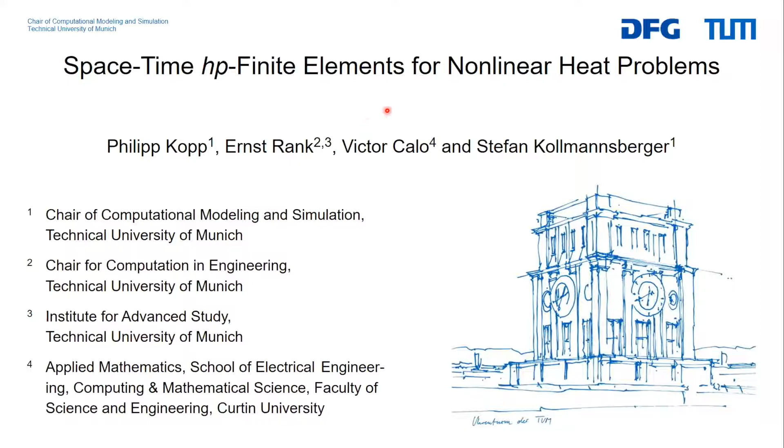So before jumping into it, I would like to give you just a short introduction, or an idea of the presentation. So we have been talking about simulating the heat evolution in SLM processes over the last days. And I think the common agreement is that we need some sort of local refinement. And HP finite elements have been really successful in dealing with the multi-scale nature that we have in space. But one of the issues that we still have is that in time, it's the same thing, right? So it's not only multi-scale nature in space, but also in time.

And the idea of this work is that we consider this combined space-time domain, and then we don't do a time stepping, but we discretize this with space-time finite elements, and that would allow us to basically choose an adaptive method that doesn't only refine in space, but in this combined space-time domain. Now, to recover the video that I just showed, you would then have just a slice that sort of travels through this domain in time.

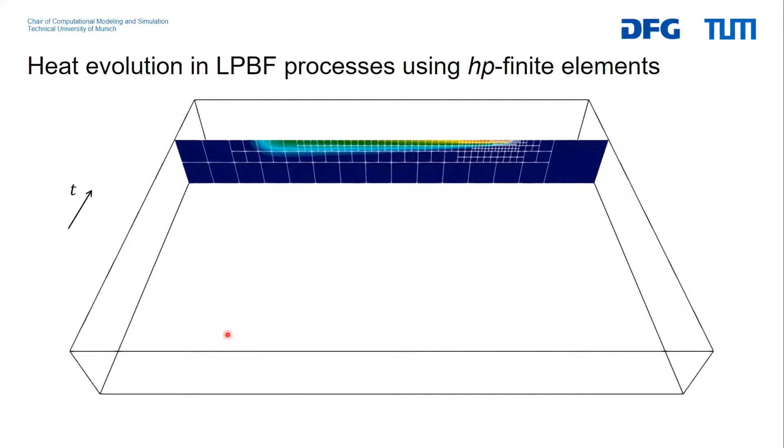Of course, solving the entire problem in one go isn't really attractive, because that would limit the kind of problems that we could compute. So we would still like to recover a stepwise solution, or as we call it, a slab-wise solution, where we basically choose parts of the entire time domain, and we progress in steps that are conforming to the elements of the base mesh here.

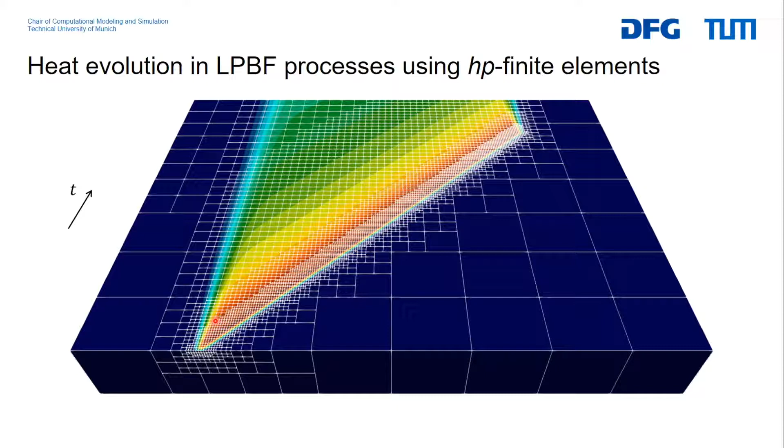And then the idea is that as opposed to time stepping, we can really choose also the problem size. So if we are simulating on a laptop, for example, we could choose very small time slabs that are still refined locally in space-time. But if we think of really utilizing HPC resources, then we could also go for very large time steps. That would then be very expensive to solve, but also give us the solution of maybe even many laser strokes.

So my talk is structured as follows. I will introduce the model that we are using, then I will talk about the formulation, and I will try to give you an idea of how we define these HP basis functions in 4D, which is eventually the goal. And this, of course, requires some structure.

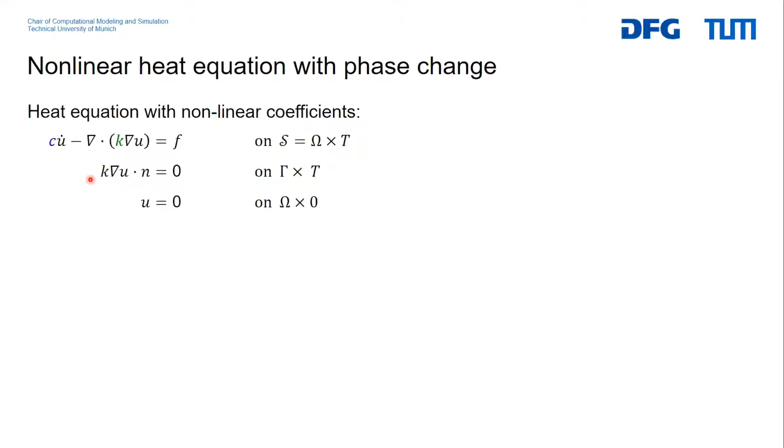So we use the nonlinear heat equation with phase change. So we have also a volumetric source here that basically has an extension in the z direction. This is a parameter that we can choose and then fit to the measurements. The phase change model adds this latent heat term here, which is then expressed in terms of this smooth phase change function. And this gives us this peak in the heat capacity.

And on top of that, we also add a little bit of conductivity in the liquid phase, which allows us to dissipate the heat a little bit faster, which is mainly there to tune the length of the melt pool. It doesn't really have too much influence on the other parts. The depth of the melt pool is influenced by how we choose the z extent of the source. And then the entire cross-section area is determined by the absorptivity that we choose.

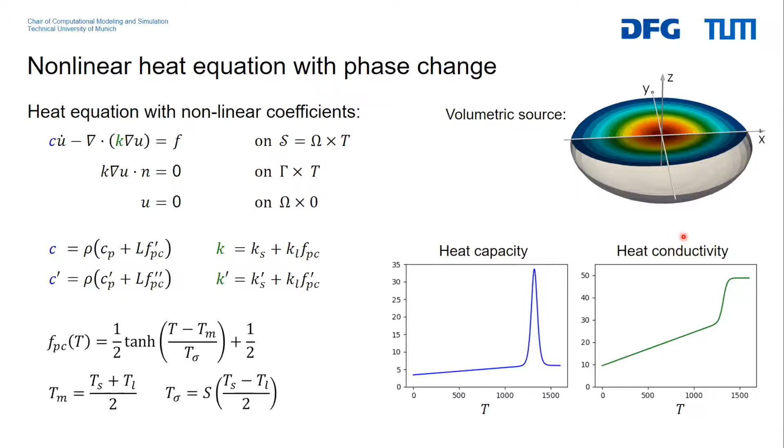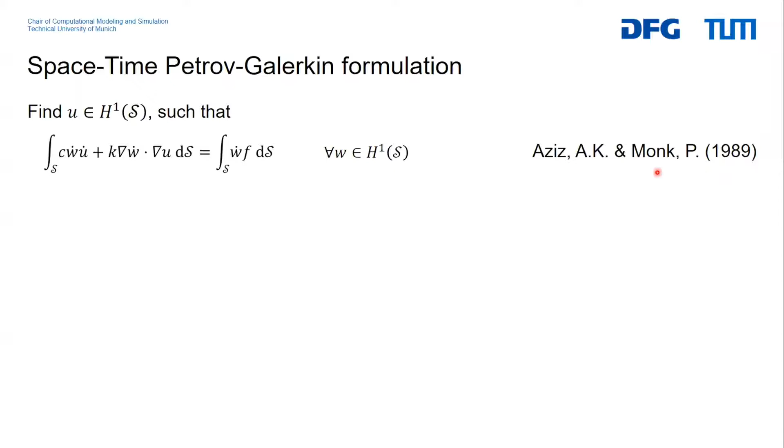The weak form is then a Petrov-Galerkin formulation, where we want to find a solution from H1. But instead of testing with the standard functions from H1 as well, we test with the time derivative of those. And you can really see the connection here to convection dominated flow, where you have these streamline upwind methods, which in our case is a bit easier because it's a pure transport in time, and it's really orthogonal to the space direction. Then you have only diffusion in space, but no diffusion in the time direction. So this simplifies things a bit. This is a not so new approach that you can check out here.

The discrete weak residual and the linearization is then the following. And you can also see that we have the time derivative on the test functions here. This gives us this mixed term between the time derivative and the spatial gradient. But through the way that we choose our meshes, and the way that they're orthogonal between space and time, it doesn't really pose any challenge.

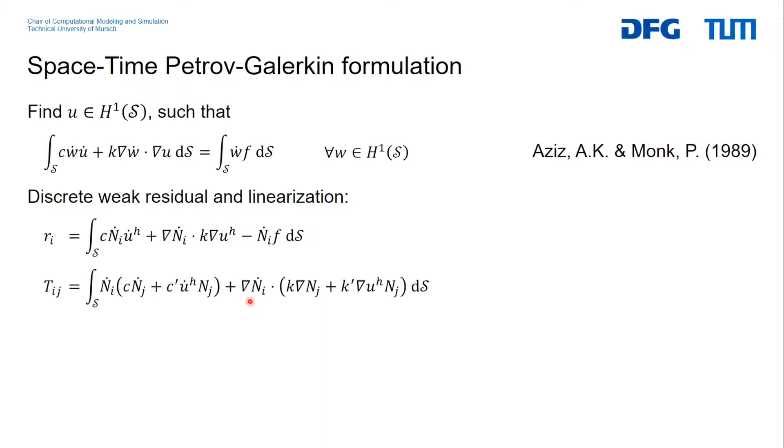Then to make the nonlinear iterations converge nicely, we have to make sure that we integrate the elements that contribute to the phase change accurately enough. And because the nonlinearities introduced are pretty tough, we also use a bisection type algorithm that helps us to obtain an improved update as opposed to always following the entire Newton update.

This is especially important as with this space-time approach, you don't really have a nice initial guess. With time stepping, you can always use the previous solution as a kind of initial guess. But here the previous slab really just serves as the initial condition, which is a Dirichlet boundary condition for the next slab. And that doesn't really give us any information about how this then extends into the domain.

So something that we also do to make this a bit nicer is that we start with a very smooth phase change that helps us to obtain a good initial guess before we then set this parameter to whatever we want.

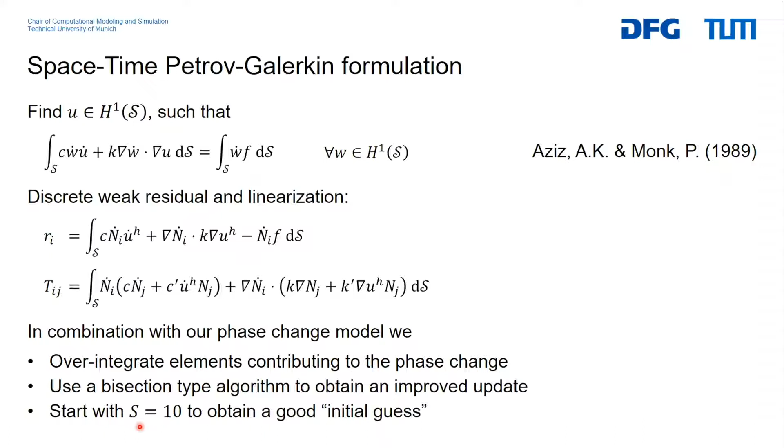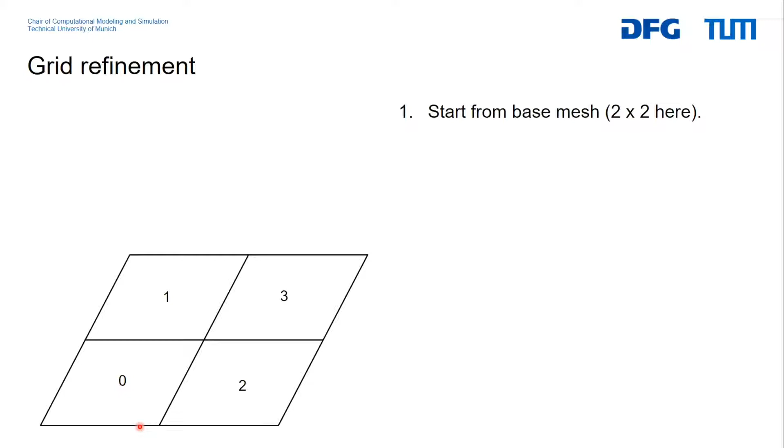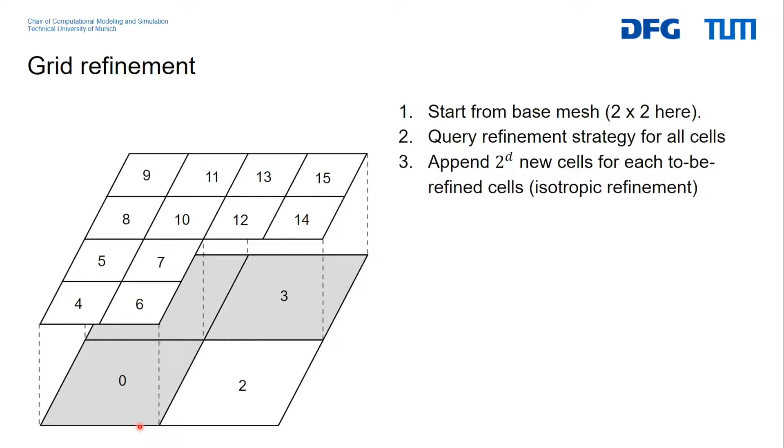So then the real challenge is to define these HP basis functions in 4 dimensions, or in general in more than 3 dimensions really. And we do that by first starting from a base mesh, and then we have a space tree based refinement. So in 2D here it would be a quad tree. We query a refinement strategy that gives us some cells that we want to refine, and then we do this recursively until we don't have any elements to refine anymore.

Then we select some polynomial degrees. So in this example here, I choose polynomial degree 3, 2, and 1, which is really just for the example. There's no restrictions with respect to the polynomial degrees. They can differ between elements. They can be anisotropic and so on. In the hierarchical view, we would have something like this.

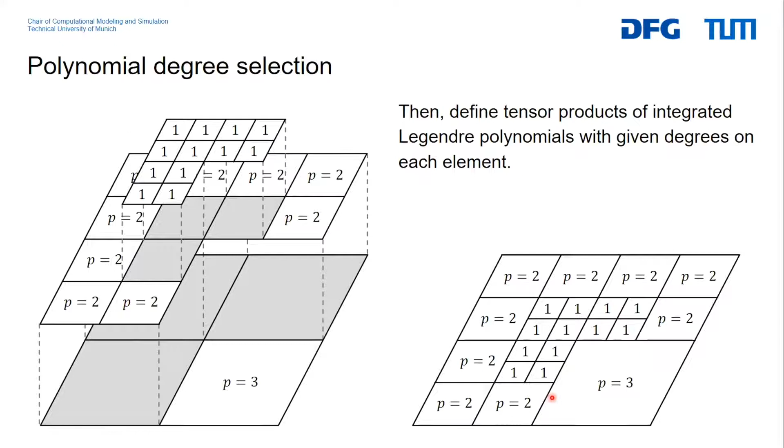And this leaves us now with the problem of hanging nodes. So you can see here that there are some nodes, or some edges, that are not really compatible. And this then translated looks like this. So we have shape functions here that we would like to complete with something like that. But instead we have these shape functions, and then the question is how do we find a combination that adds up to that, and especially how do we do that in 4D?

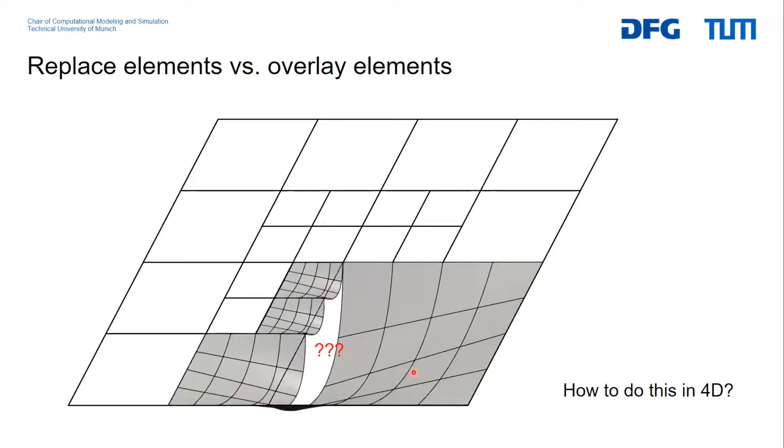So the idea of this multi-level HP approach is to go a different route and realize that we have a hierarchy in our grid, and that we can really just complete this shape function on that side without really bothering with these overlay elements. And of course, as you can see, there's a difference in the support. So you have a slightly larger support here, but this is just a trade-off, and this price is something that we have to pay with that method.

Now, one thing that we have to make sure is that on these overlays here, we don't have any active shape functions, because otherwise there's nothing on this side to complete those. So that's the only constraint that we have to satisfy. And in order to do that, we distinguish between external boundaries, so these are cell faces that coincide with the domain boundary.

And on the other side, internal boundaries, which are cell faces that are not part of the external boundary, and they are also not interfacing to another cell of the same level. So it's different levels. And then we have cell interfaces, which are just interfaces between 2 cells of the same level.

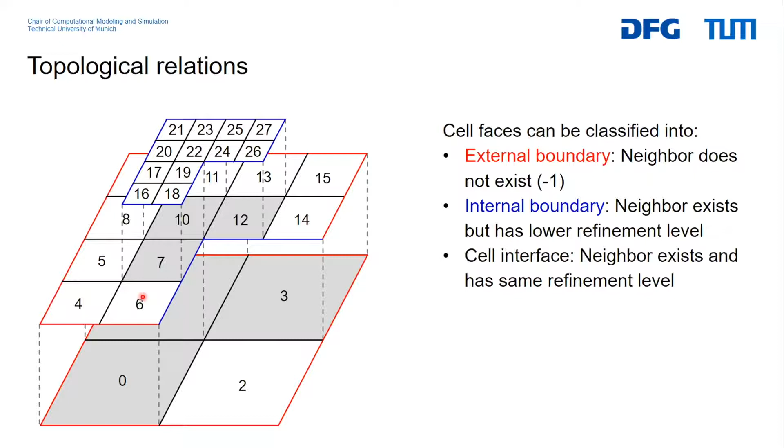So this then allows us to construct a multi-level HP basis with the goals that, first of all, we want completeness. So each leaf should be able to represent polynomials according to whatever we chose. We want to have continuity, so no overlay basis functions. Translated to our setting, that means that no overlay basis functions shall be active on these internal boundaries, so the blue lines from the previous slide.

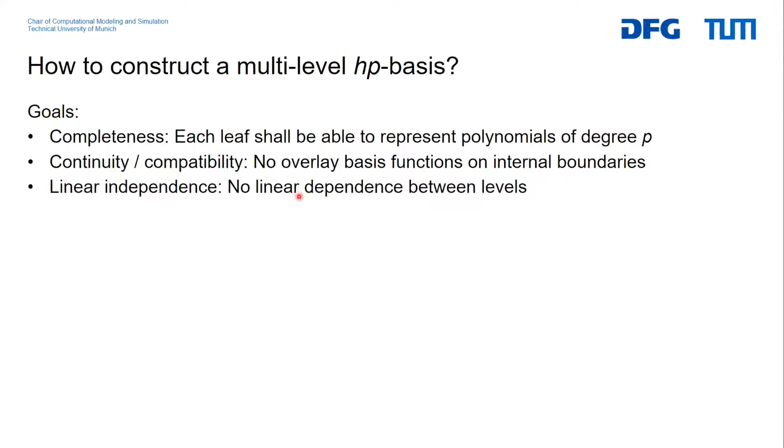And we also need to be a bit careful with what shape functions we introduce in order to not introduce any linear dependence between those levels. And the basis for the algorithm that I will just quickly show in the next slides is that we use d-dimensional arrays of Boolean values that we call tensor product masks to track active shape functions.

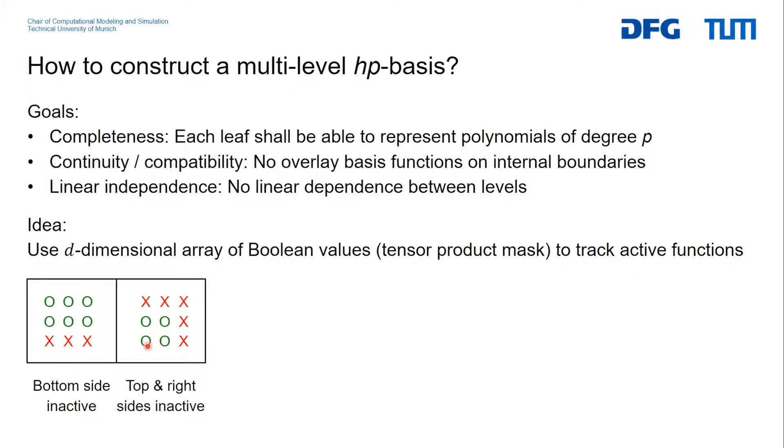So that then looks like this. So we have in this example 2 cells, and we have this tensor product mask, which in 2D is really just a matrix basically that tells us in the tensor product of our shape functions which are active and which are not active. And clearly in this case, we can see that we are not having a compatible set of shape functions. So there's no way that we can combine them to something that is continuous.

And in order to do that, we have 2 operations that restore that. So we have an operation that takes these 2 slices and activates shape functions if they are active on one of the 2 sides. So this is what you could also say is a Boolean or logical OR operation on these 2 slices. And on the other side, we have something that deactivates if a shape function on one side is not active. So this would then be a logical AND operation.

And this is really the core idea of what I'm presenting, that we have algorithms that work in terms of the interfaces between cells and nothing else. So we don't really consider anything else. We just try to formulate our algorithms in terms of these, because that allows us to extend those algorithms to really any dimension, because it's not really hard to do in 4D or in really any dimension.

So I would quickly like to show the algorithm just to show you that it's really no magic and it's a pretty simple idea. So the algorithm is that in the first step, we activate all the shape functions on our leaves of the refinement tree. So that will give us something like this. So we have polynomial degree 3, 2, and 1. And on the others, nothing is active. And this leaves us with a state of non-compatible shape functions here.

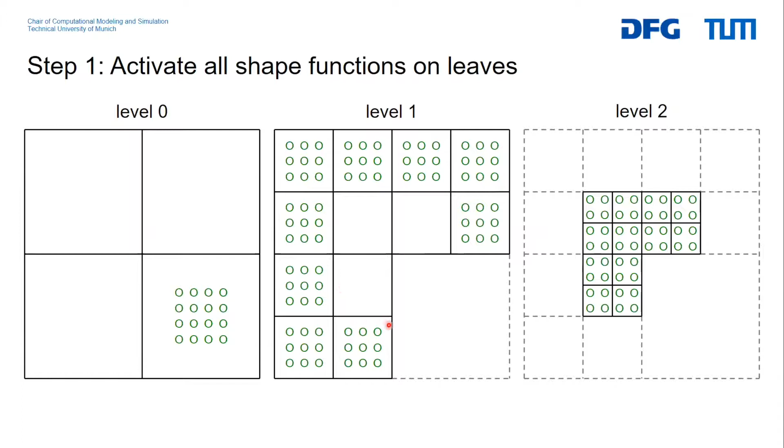So in step 2, we use this OR operation to activate shape functions on these non-leaf cells. And as you can see here, there's one contribution missing from this cell that should contribute to this nodal mode. So we have these 3 contributions, but it's not completed by this cell. So we have to basically follow this with another iteration of this algorithm to then communicate the information from here, not only to these 2 elements, but also one distance further.

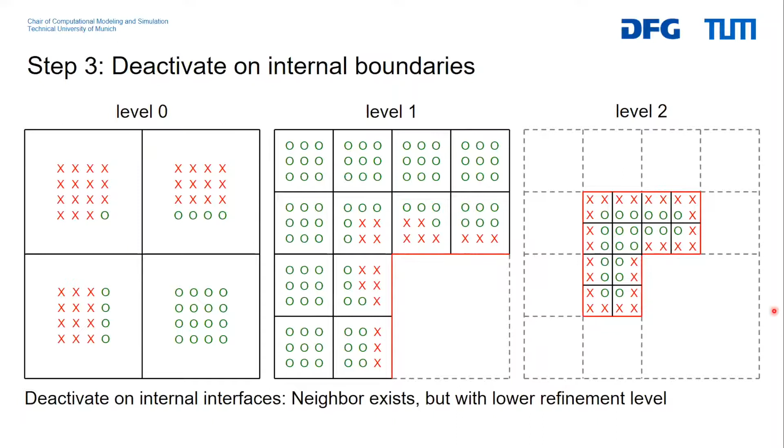Then step 3 is that we deactivate everything on internal boundaries. As you remember, we have these internal boundaries here, and we simply deactivate everything. And we have a similar scenario that there's one shape function here that still contributes to this nodal mode, which should have been deactivated. And therefore, we follow by another step that's very similar to the second iteration, now just with a Boolean AND, and this will deactivate that shape function. And that's basically it. I guess this is the core of the algorithm. And what you see here is the state of what shape functions are active and what shape functions are not active. And the principle is the same for 2D as it is for 4D.

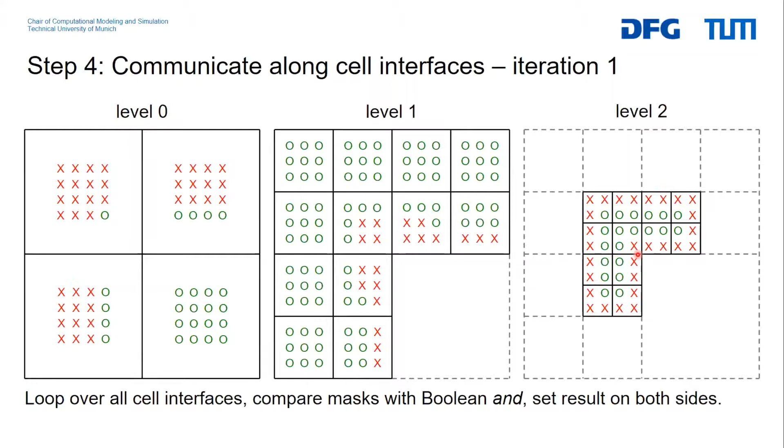Now there's another step that I don't really go into much detail, but it follows a similar idea that then constructs the global indices and leaves us with just a numbering where we can see, for example, here that this nodal mode has contributions from all these 4 cells as we would expect.

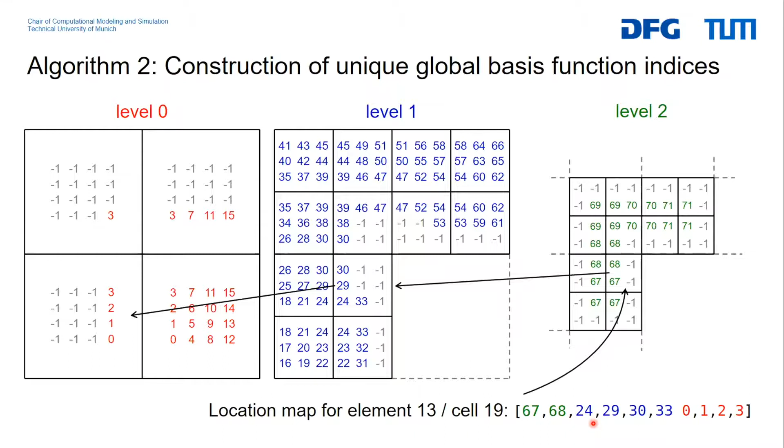And then the location maps for the individual elements would be the active shape functions plus all the parents. So we then take these 2 active shape functions and we append all the parents. And that will give us the location map for this element. And as you can see, there are slightly more than the 4 shape functions that we would expect, so there's a price also here to pay. But as I said, the focus here is for now on simplicity. So this is really the core of the method.

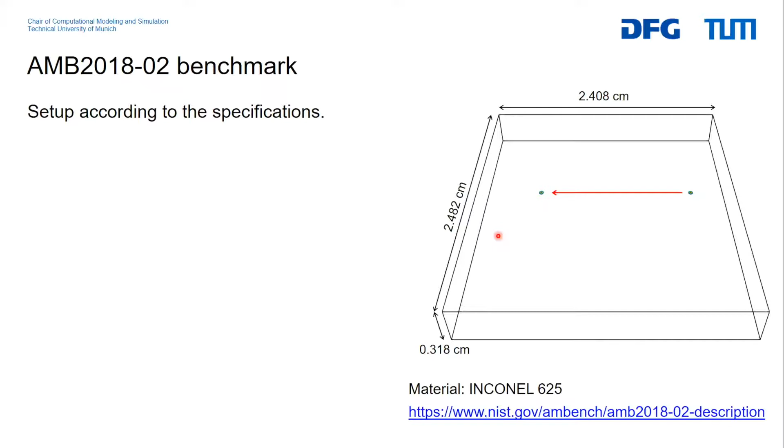Now I would like to show how this looks when we actually apply it to some examples. So we computed this AMB2018-02 benchmark. The setup is according to the specifications. It's a 3D example, so now, of course, we are computing in 4 dimensions. The absorptivity is 0.32. Then the source depth is 0.3 times the width. And the phase change is a little bit smoother than it would be with 1.0, and we also have a little bit of added conductivity there.

The discretization is 12 by 12 and 2 elements in Z and 8 elements in time, and that will allow us to compute this problem in 8 nonlinear computations. We also have 5 levels of refinement. We have p equals 4 in space, p equals 1 in time, which is really for now just a choice that I made.

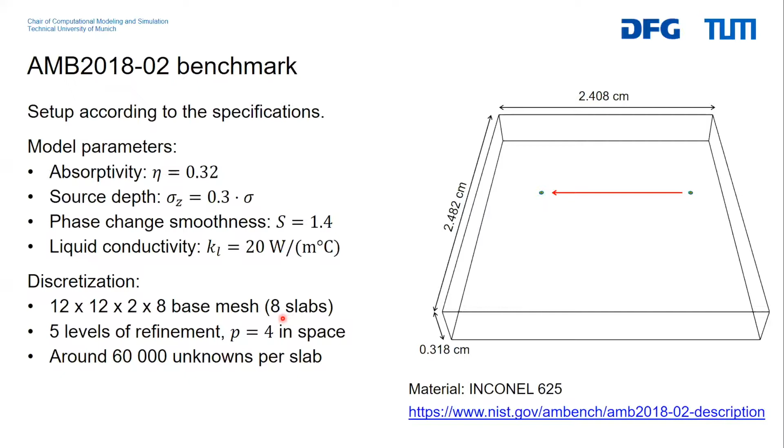It doesn't really mean that this is optimal, but clearly we also need some form of error estimation in the future. And this gives us around 60,000 unknowns per computation, so per one of these 8 slabs. Then in the computation, we see these are now 3D slices through time. And you can see that the refinement here follows the path of the laser pretty nicely. You can also see in which slab we are here. So it's 8 computations, as I said.

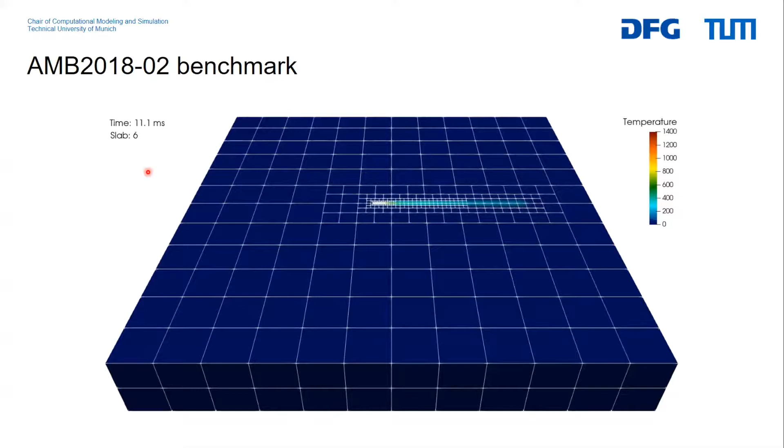And if we look at the geometry of the melt pool, then we can see that the tuning of the parameters was reasonably successful. So we get very good comparisons to the experiment in the melt pool dimensions. For some reason, the cooling rate here wasn't really very nice. I don't really know what the reason for this is. Definitely needs some further investigation.

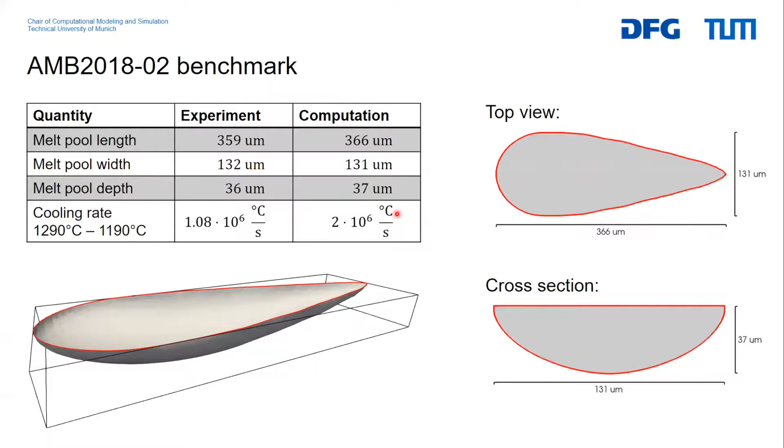And then to show that we can also do more realistic or more expensive computations, we basically take exactly the same setup and we just let the laser not run once from right to left, but basically have the square and then hatch the area inside.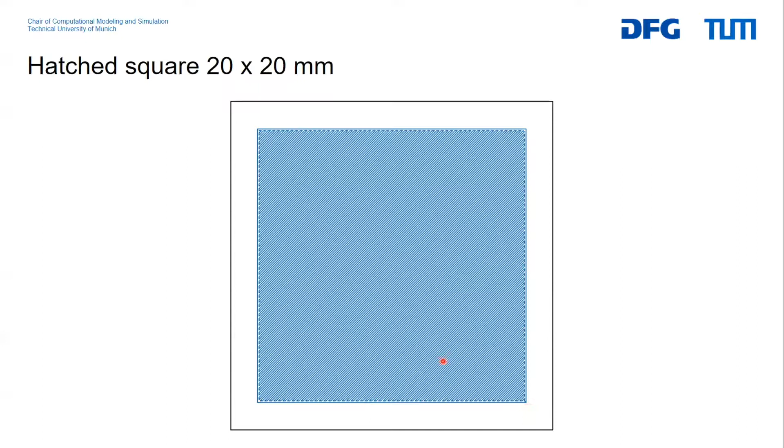If you look at this, we also see that here the refinement tracks the laser very nicely. We can also see that now we have more slabs than the 8 that we had before, but we don't progress as fast as we would with a time-stepping scheme. We also see that we still have a very good estimate of this melt pool here.

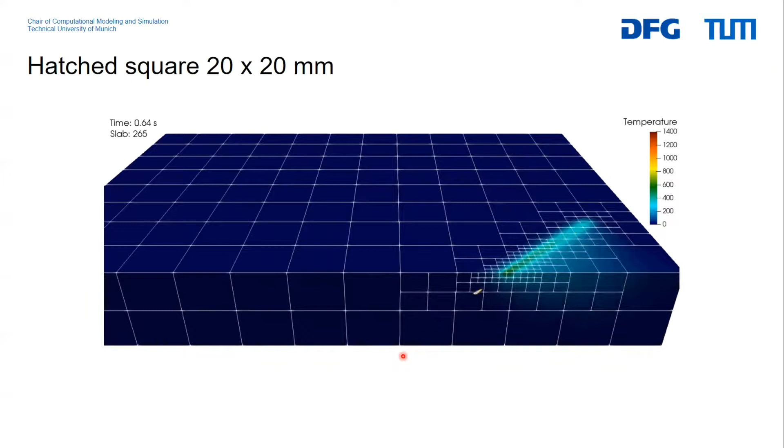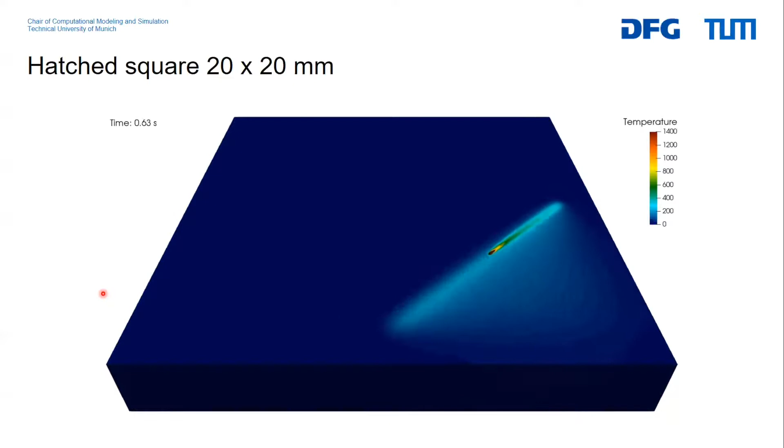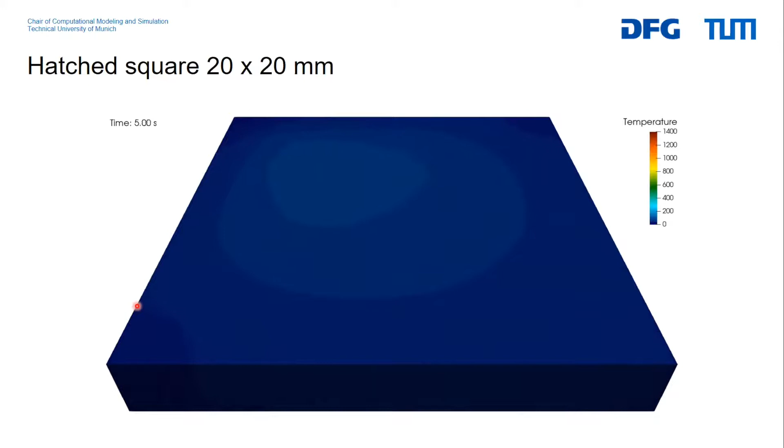Because this video takes a long time, I think this gives a better impression. So this is in real time now. It's about 5 seconds of simulation time, and it's about 3.4 meters of laser distance covered. And the computation was done on a single CPU. And as I mentioned already, the idea is that we move this entire setup then to something that works on HPC systems in order to bring down the computation time, which was a few days for this.

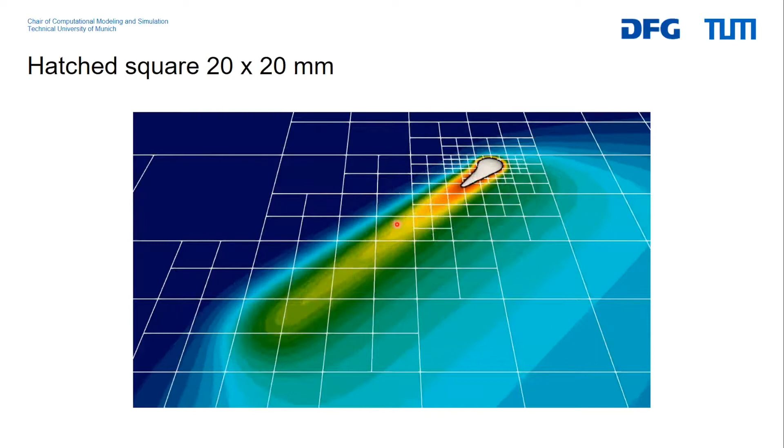Now, if we zoom into the very final bit here, then we see that we can also extract some information about the melt pool here. So as we expect, the geometry of this melt pool changes and it becomes bigger towards this end where the tracks are in very close distance temporally. And yeah, so we can just look at the melt pool geometry here. And for example, here it's 60 micrometers, the depth, as opposed to the 37 that we had for this AM benchmark.

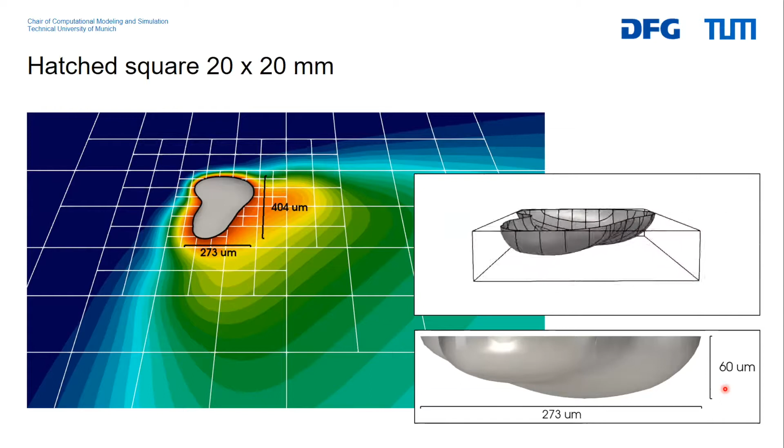All right, so with this, I would like to conclude. So we introduced an efficient alternative to the multi-level HP approach, which was introduced a couple of years ago for 2D and 3D, that in our case extends well to really any dimensions. We show that this enables us to do local refinement in this combined space-time dimension, not only with adaptive time stepping, but really with different accuracy in time depending on the spatial location. It allows us to exploit HP capabilities.

We also can use what we call the trunk space, which would reduce some of the modes from the tensor product that are not required for convergence. We use a simple phase change model that doesn't have any directional dependence on the laser travel direction. And we already get a very competitive performance on a single CPU. And as I said, the idea is then to extend this to distributed memory parallelization and HPC systems.

For that, we need to investigate linear solvers and preconditioners. So I think this is a very important topic that will really decide whether this makes sense or not, I would say. We also want to extend the physics. So we want to simulate with actual metal powder layers. And that together also then needs some further model validation.

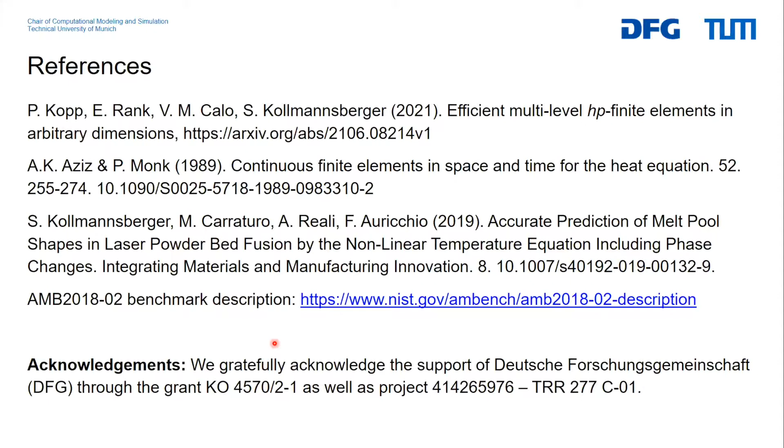So these were my references. And with this, I'd like to conclude, and I'm happy to answer any questions.

Thank you, Philipp. Surprisingly, I don't have any questions. Who would have thought? But maybe the audience does.

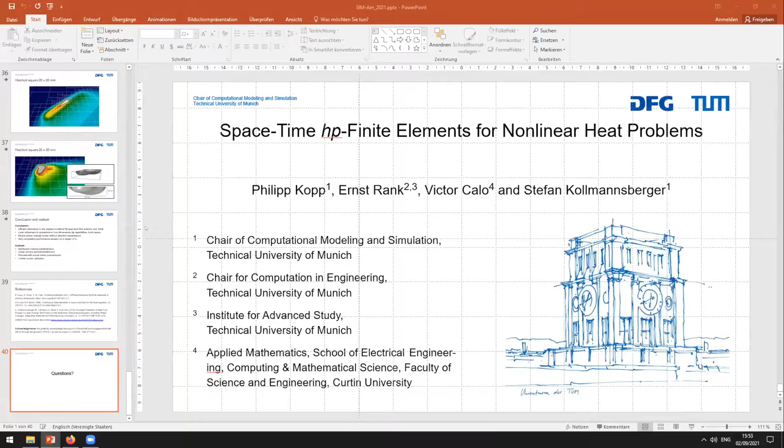So I can say maybe something. Yeah, sure. Go ahead. You have 10 minutes.

No, 5, 7. So the code is partially open source. So this entire refinement that I introduced here is all open source. The space-time stuff, which is really related only to the model and some very specific things, is not yet open source because it's also a bit of a mess and not entirely published. But if anyone has any interest in the future, you can just let us know.

There is one from Vamen Sivat from the audience. I'll read it out. Thanks a lot for this amazing talk. We should use more deep math techniques to improve our simulations. I would be interested in your opinion about combining your approach of discretizing space and time with HPFEM with a real error estimator. Absolutely, space and time.

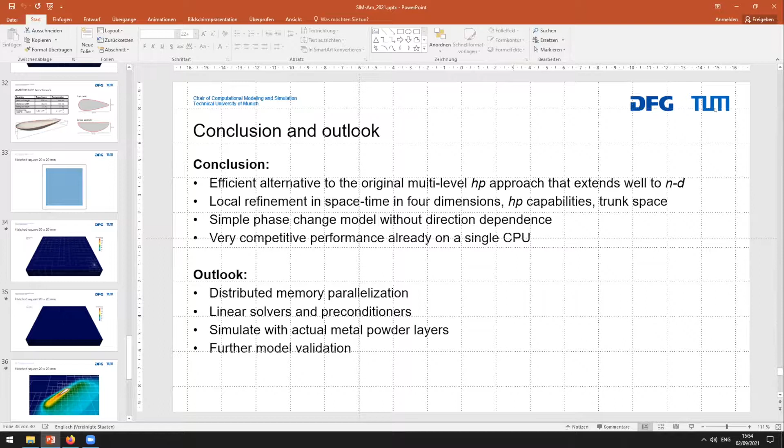Absolutely. I think that's even necessary because the refinement that we have here, I think you can see it, right? It's just not in full screen. So that was already not very trivial to come up with. This is basically hand-tuned based on the history of the laser. It captures it pretty nicely, but it also uses resources in places where you don't really need resources. And then sometimes it also misses some things.

So I absolutely agree that we should use more error estimation. And I also think that this whole topic of DG-FEM with space-time might also be something that is really interesting to look into. Then the second part is, do such error estimators already exist? To be honest, I don't know. Error estimation is a big research area, of course. I'm sure that there exist some. I don't know if there is something that would be directly applicable to what we are doing. The principal theory exists, and we would have to look at it.

Massimo, please go ahead with your question. Hi, Philip. Hey. Thank you. Very nice talk, by the way.

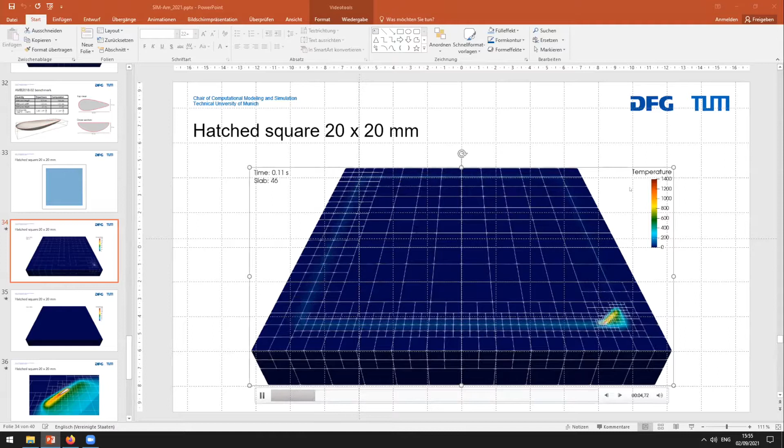And what I want to ask is, which is the ansatz order that you use for this large simulation? For this one here? Yeah. So it's p equals 4 on all the levels except for the finest 2, so on 0, 1, 2, and 3, and then p equals 3 on levels 4 and 5. Ah, okay. So it's adapted also in this sense. Yeah, but only in space. In time, it's for now p equals 1.

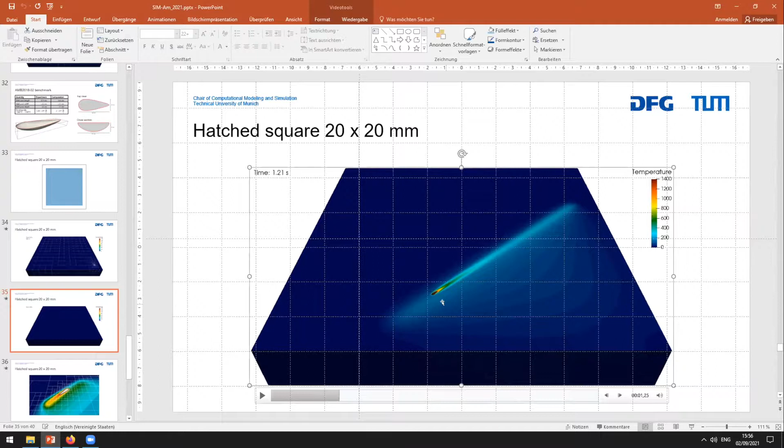And also if you look very closely here, you see that it's not perfectly resolved. You see the spatial resolution looks very fine compared to the melt pool size. You have already like 2 or 3 elements for the melt pool width. Yeah. Have you tried with linear elements everywhere? In time? Or like, what? No, in space. So p equal 1, like lower order.

Maybe, but the problem with how this multi-level HP method works is that you have a lot of overlay shape functions coming from here. So it tends to be more efficient to really go for higher order here. So I think if anything, I would remove one level of refinement. Yeah, but far away from the melt pool, okay. But since you are already refining a lot around the melt pool, you are still keeping p equal 3. Yeah, on these two levels here. Maybe that can help to slow down a little bit the computational time.

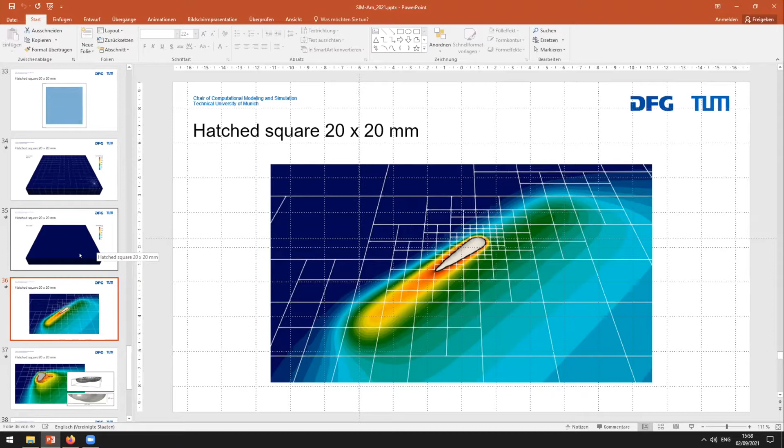Anyway, the results in quality of the approximation that you get are really impressive. And I think for the cooling rate, maybe it's because the uncertainty they have on the measurements is pretty high. Yeah, I was also thinking that, but I was a bit scared to doubt the measurements. Yeah, but they have an uncertainty quite high on the cooling rate, so maybe that's the reason. I saw that you also overestimated it, so I was a bit more confident that maybe it's not so bad. Exactly. Thank you anyway. Cool, thanks.

I mean, the real hope here is to be able to solve parallel in time. What do you think? So I think that we had this discussion about the aspect ratio on one of the other days, and someone mentioned 10 to the power of 8, and right now we are away by a factor of around 4,000 from that. And this doesn't really seem that far out of reach if we think of doing this in a parallel fashion, maybe also with a bit more efficiency. So that's definitely the hope, that we can do this in parallel.